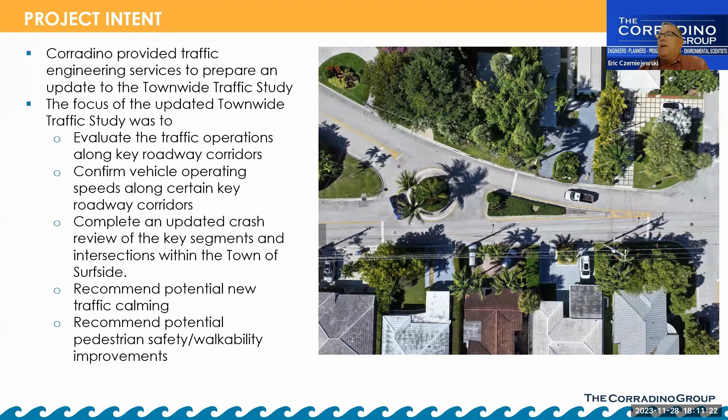The project intent: the town's master traffic study was last updated in 2012. So 10 years later, we're doing this update in order to update the traffic numbers, look at traffic operations at key intersections, and the speeds throughout the town, including 85th percentile speeds. We'll do a safety review to see where the safety issues and concerns are from a crash standpoint, and also look at potential new traffic calming and pedestrian safety walkability improvements. We'll go over all of those items, but that was our intent and objective as we embarked on this project.

The first thing we do when updating a townwide traffic study is collect traffic data. What you see here is a map showing the data collected back in September of 2022. We collected manual turning movement counts at 30 intersections, depicted with blue circles at key intersections. There was also historical manual turn movement counts at the intersection of 91st Street and Collins Avenue, where we had done a signal warrant study, so we utilized that data.

Manual turning movement counts were collected at two intersections not only once back in September, but again on February 7th, 2023, when Bay Drive was closed for the park project. This let us determine what happened to traffic operations at the intersection of 96th Street and Abbott Avenue, which is unsignalized, and 96th Street and Byron Avenue, which is a signalized intersection.

We also collected data, 72-hour bidirectional volume speed tube counts at 14 locations throughout the town. These are depicted at the red lines you see on the map. These were collected in order to determine what that 85th percentile speed is.

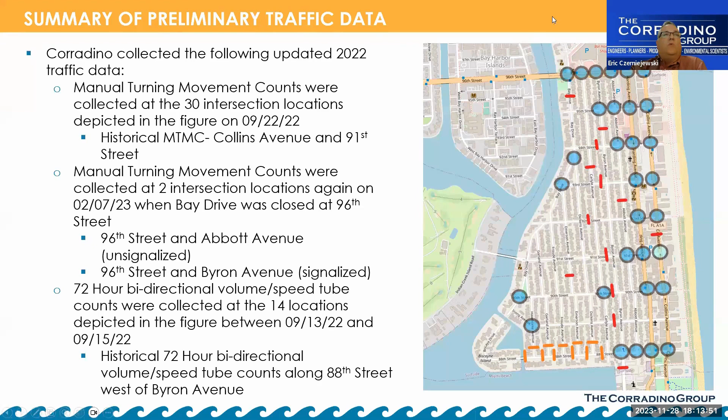In addition, there were historical 72-hour bidirectional speed volume counts also along 88th Street west of Byron Avenue. You see those depicted in the orange lines on the map. Those were done and collected back in 2021 when we did the multi-way stop control analysis study. So all of this here is data that we utilized in our update to the townwide traffic study.

96th Street was also looked at closely. We looked at Byron Avenue and Abbott Avenue closely, in addition to obviously Harding and Collins Avenue, which we've already just looked at. The intersections were evaluated with Bay Drive open and Bay Drive closed.

There was very negligible and minimal difference. Obviously, the traffic counts were collected at different times. September were adjusted for the peak season factor. It was about 11% because obviously September is still not your peak time.

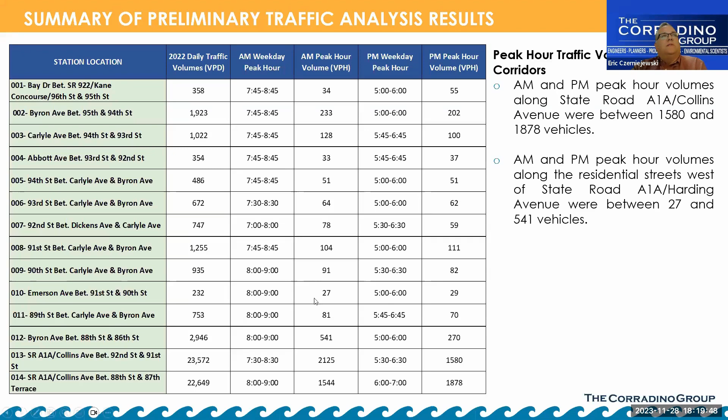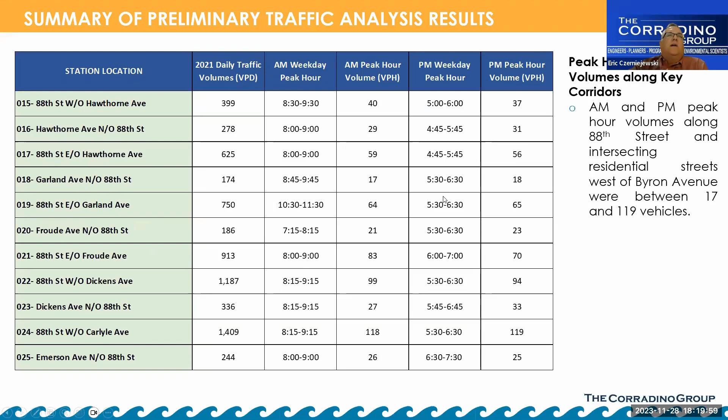This is important because when you see the requirements for traffic calming measures by Miami-Dade County, there's a certain minimum traffic volume they want to see up to a maximum traffic volume. So the peak hour is an important metric when deciding what improvements we can make. This is another important table - here's the same table for 88th Street. Again, low volumes as you'd expect, peak hours between 17 and 119 vehicles in the AM and PM peak hours.

As I was indicating, and as Hector indicated, there's a criteria in order to implement traffic calming measures. This is what you see here from Miami-Dade County. When municipalities have traffic calming funding, 85th percentile speeds exceeding the posted speed limit by 5 miles per hour or over are considered excessive speeding and can have traffic calming measures installed. If Miami-Dade County is putting them in, it needs to be 10 miles per hour or greater than the posted speed limit. That's an important distinction as we go through here.

And here's the minimum traffic volumes: between 150 and 300 peak hour volume, or 1,500 to 3,000 per day vehicles on those streets.

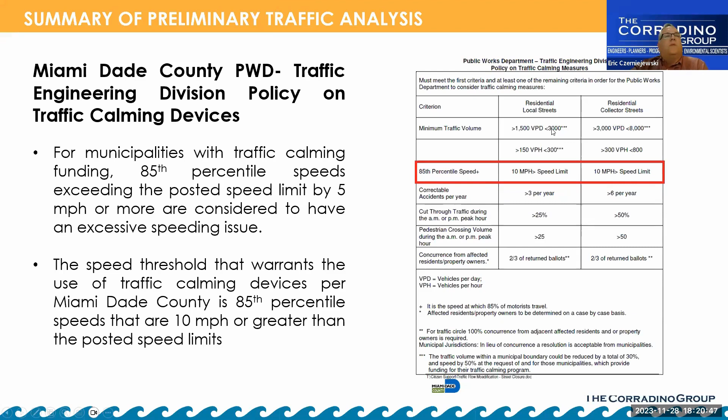So what I did here is see which streets actually meet those metrics: Byron Avenue between 95th and 94th, Carlyle between 94th and 93rd, 91st Street between Carlyle and Byron, Byron between 88th and 86th - that's not in the town. And similarly on 88th Street, there's the volume threshold as well; a couple of streets between Carlyle and Dickens met that criteria too.

As far as meeting that criteria based on speeds to install various traffic calming measures - keep in mind, the streets where we collected speed and volume data were typically locations where you could lay tube counts where there weren't traffic calming measures already, so you could get a true depiction of whether cars were speeding. Obviously, the roundabout at 88th Street and Abbott Avenue deters traffic volumes and speeds right away. So I tried to select locations that didn't already have traffic calming measures installed, to get a good picture.

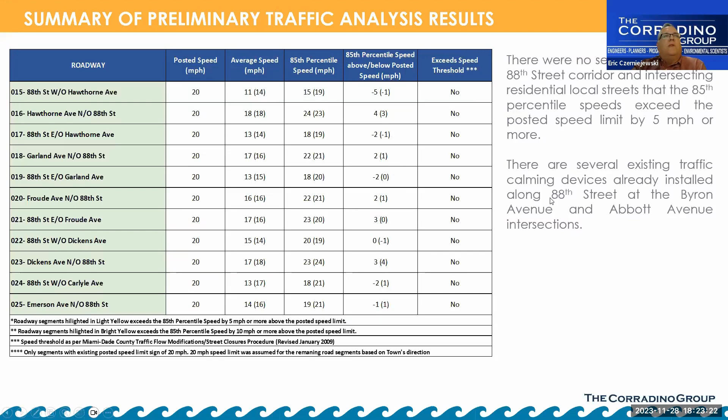What you see here now is we looked at 5 years worth of crash data. Safety review is an important element of evaluating overall safety for not only vehicular but bicyclists and pedestrians. This was an overall 5-year crash review of the whole town limits - you can see the black limits here in Signal 4 Analytics, a program with geo-based data updated nightly at the University of Florida. I did a screening from 9/1/2018 to 9/1/2023, and there were 1,148 total vehicle crashes with 191 injuries and 1 fatal crash at Harding Avenue and 91st Street. The predominant crash patterns were rear end crashes and sideswipe crashes.

I didn't want to just stop there.

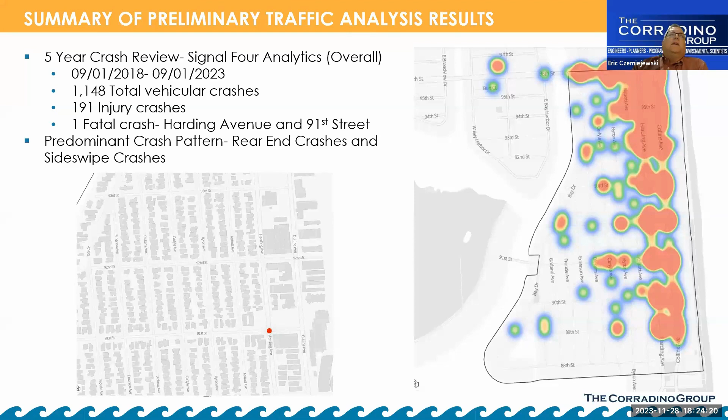I then looked at the crash data for the residential streets west of State Road A1A, Harding Avenue southbound, so that we could determine the metrics for the crashes that were just in the residential area. You can see the heat map of where those locations are.

That's important too, because another one of the criteria for Miami-Dade County for installation of traffic calming measures is correctable crashes and crashes at intersections. You can see high locations of crashes along Abbott Avenue, 95th, 91st Street for a stretch, at Carlyle, Byron, and Dickens. Then 88th Street, there's a stretch of crashes as well. The predominant crash patterns were left turn and angled crashes.

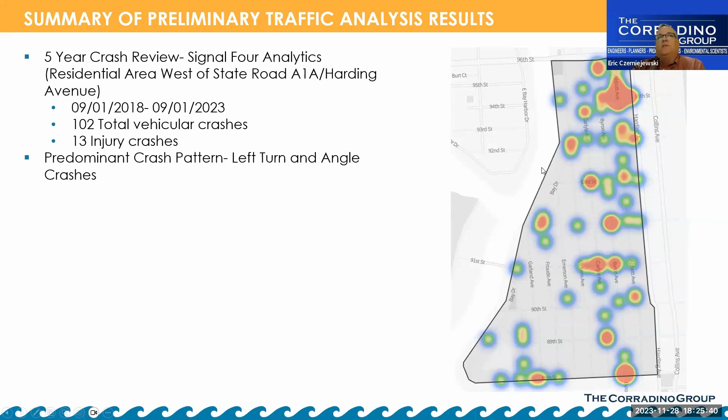I did the same network screening for areas west of State Road A1A, and 102 vehicular crashes along with 13 injury crashes were in the town. It's a significant difference from 1148 to 102, but still way too many when we want zero crashes on our roads, especially in our residential neighborhoods. So that gives you a picture of the residential area.

So then I also looked at, I kind of took away from the heat maps, you can start looking at dots as opposed to the heat map. Obviously it's similar in nature, the heat map was created around these areas, but this gives you an idea of where crashes were exactly in the residential neighborhood.

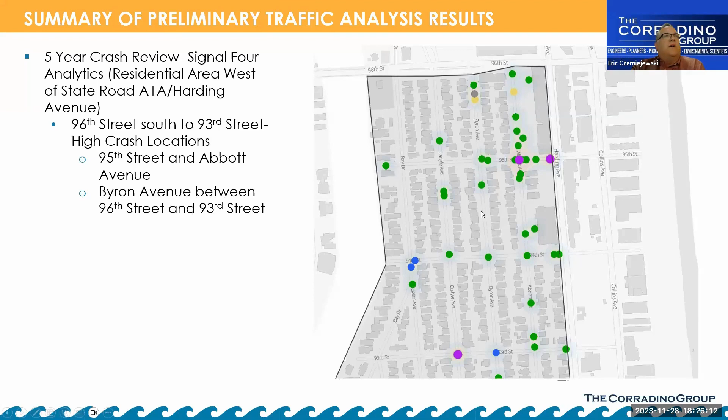We found 95th Street and Abbott Avenue, Byron Avenue between 96th and 93rd Street, there were still crashes. I moved my way down. Obviously the town is large, so I wanted to zoom in here. This is 93rd Street to 90th Street. Again, you can see dots coalescing here at Byron 92nd, there's a few others along here.

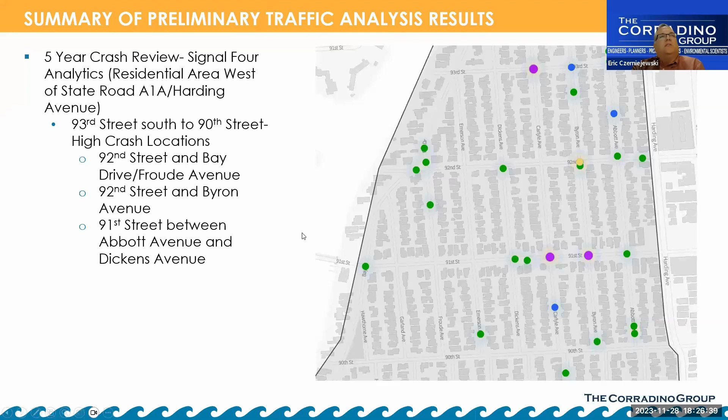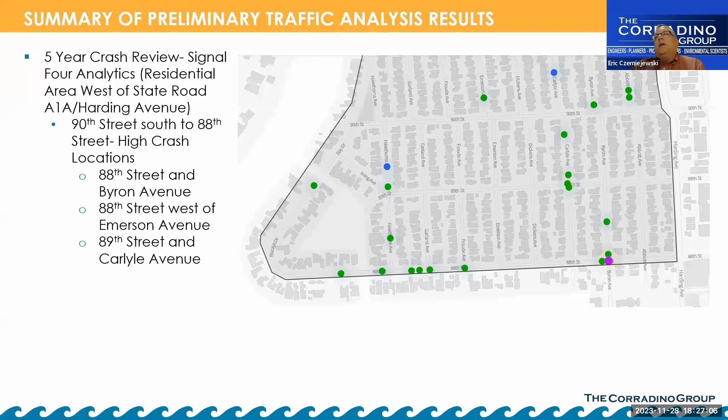So that gives you an idea of other high crash or crash locations where they had a number of crashes over this five-year period. To get further along the southern end of the town, you see here 88th Street, and there's a lot here along this stretch between Froude and Hawthorne, even on low speed streets. So something to keep an eye on as we look at potential traffic calming and walkability, pedestrian safety improvements along the residential streets.

This starts to get into where there are safety concerns at intersections and road segments from a pedestrian and bicycle standpoint. In that same period of time, there were 53 bicycle and pedestrian crashes, along with 44 injury crashes in that five-year period, which is obviously a high percentage. If it's a pedestrian bicycle crash, you expect 44 out of 53 to have injuries.

Predominantly, most of these crash locations were along FDOT state roads, that's A1A, Harding Avenue, Collins Avenue, and 96th. But there are still some locations within the residential area where we had pedestrian bicycle crashes.

Here I want to talk about recent pedestrian safety, walkability, and mobility improvements. The town has made, and I've been involved with, traffic mitigation improvements since 2015. Over these last 8 years, the town has made traffic mitigation, pedestrian safety, walkability, and pedestrian improvements very important, whether through the capital budget or going after grants.

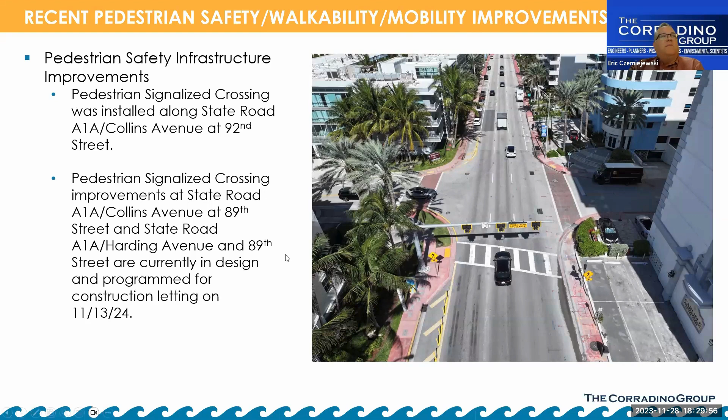I followed up with FDOT today and they gave me the update. They are programmed for construction letting on November 13th, 2024. It's another important infrastructure improvement project for pedestrian safety. The design is at 90% and expecting construction letting sometime late next year, early 2025.

As additional improvements, crosswalks start to fade away and become a liability, so the town's Public Works Department is going through and making enhancements. This is at 95th Street and Byron, and a crosswalk was also placed at 94th and Abbott. These enhanced zebra stripings improve pedestrian safety for residents, visitors, and tourists.

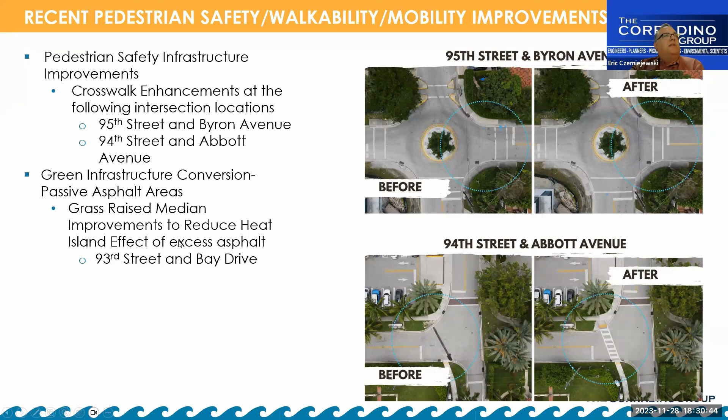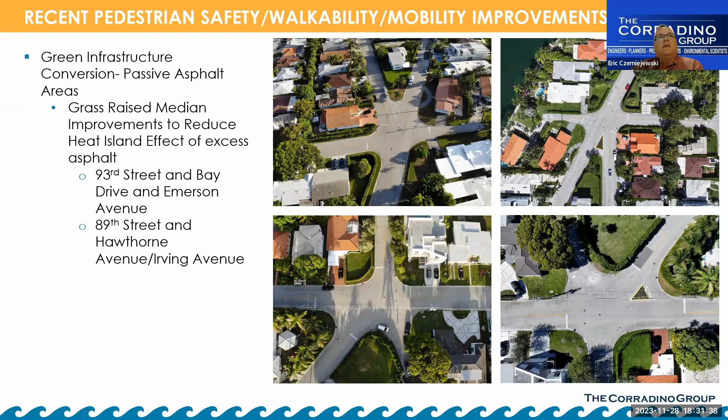I also want to mention the green infrastructure conversions of passive asphalt areas that were recently constructed. You can see before and after pictures at 93rd Street and Bay Drive, and Emerson Avenue, where little medians with green space replaced pure pavement. This channelizes cars, making it safer for vehicles, and adds resiliency and sustainability by reducing the heat island effect. You can also see improvements at 89th Street, Hawthorne Avenue, and Irving Avenue. These are all important improvements to the town's residential streets.

When you think about traffic calming, there are a lot of different measures. I'll touch on some of these. A roundabout, or neighborhood traffic circle, reduces travel speeds at intersections. You put a little circle in at an intersection and allow cars to travel around it, which reduces speed based on the diversion of the vehicle's geometric path.

Speed humps, which you have in town at a number of locations, deflect vehicles and lower speeds. Medians, like what you remember seeing along 88th Street at an intersection, keep vehicles in place as an access management opportunity, causing cars to veer out while eliminating certain movements to improve intersection safety. Diverters cause road closures as well, like at 94th and Abbott and Carlyle on 96th Street. There are also chicanes and pinch points.

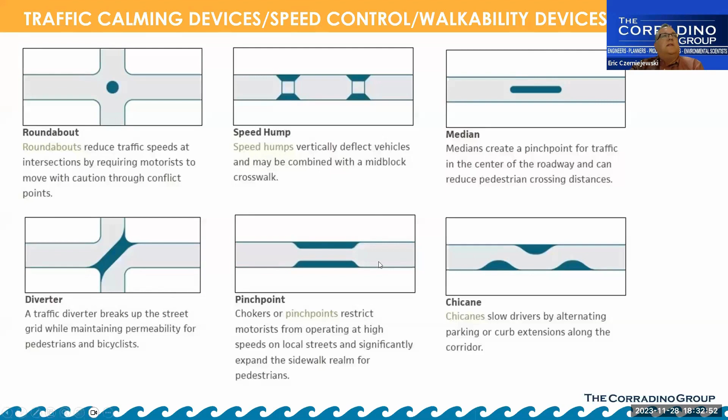This shows pictorially some of these same things: a chicane, a road closure location, a speed hump, and again a roundabout, much bigger than the neighborhood traffic circles, like the one in Cutler Bay and this one along 80th Street in the town.

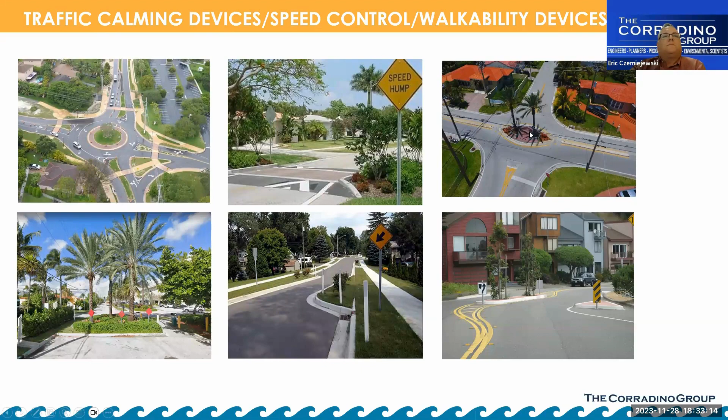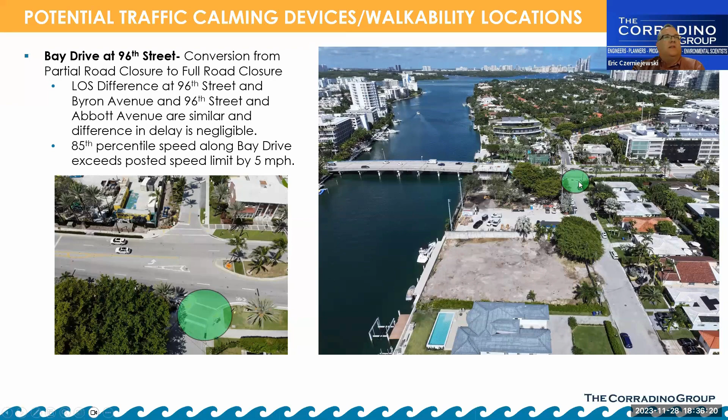The 85th percentile speed along Bay Drive does exceed the speed limit by 5 miles per hour. So we could potentially do a road closure similar to what you see at Carlyle and 96th Street at this location. Again, this is not set in stone, just one option.

Byron Avenue and 95th Street, the north leg. There's a little bulb out here at this location, you can see in the lower left-hand corner picture. There's an opportunity to improve pedestrian safety by making this more of a speed table instead of just a street level improvement, which would allow pedestrians to be elevated. Past crash history along Byron shows crash history between 96th and 94th. This would improve pedestrian safety and walkability, and the 85th percentile speed metric is met here as well.

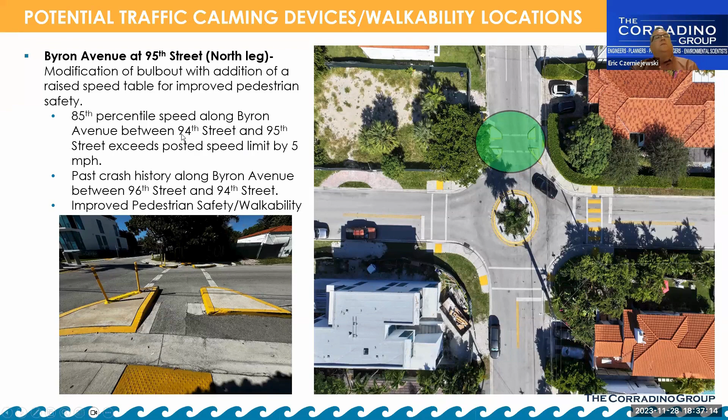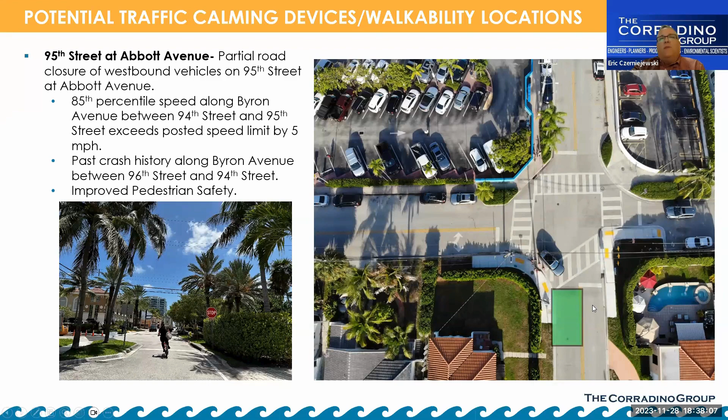95th Street at Abbott Avenue - a partial road closure of westbound vehicles on 95th Street at Abbott Avenue. This is an example you can see already installed in the town. We looked at the 85th percentile here; there's a lot of commercial traffic coming out of this parking lot. You could do something similar to this corner closure to eliminate that traffic coming in westbound on 95th Street at Abbott Avenue. There's past crash history along Byron between 96th and 94th, and this would improve pedestrian safety and eliminate some of the traffic diversion at this location.

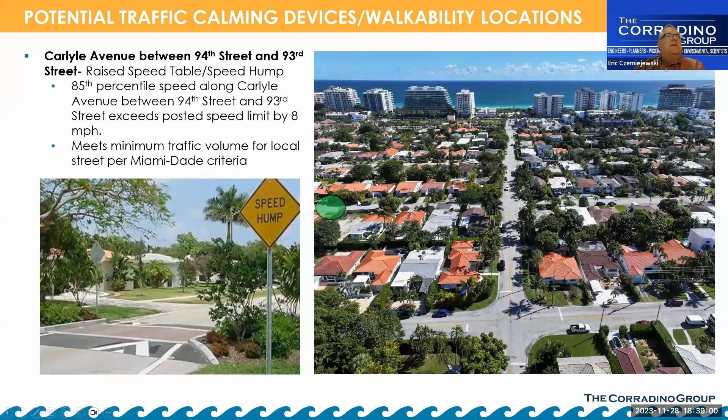We'll get into some of the speed tables and speed humps. Carlyle Avenue met the 85th percentile speed between 94th and 93rd Street. It exceeded the posted speed limit by 8 miles per hour, one of the higher speeds. It meets the minimum traffic volume criteria for local streets per Miami-Dade County criteria for installation of traffic calming. This is my aerial drone image showing a tentative location, probably mid-block between 94th and 93rd Street, giving an idea of a potential location for a speed table or speed hump.

You don't want to see too much of a speeding issue usually from 0 to 4 miles per hour over - that can be handled through enforcement. Once you get to 4 to 5 miles per hour over, it starts to be a concern, which is why the performance metric there at 5 miles per hour is what it is for Miami-Dade County.

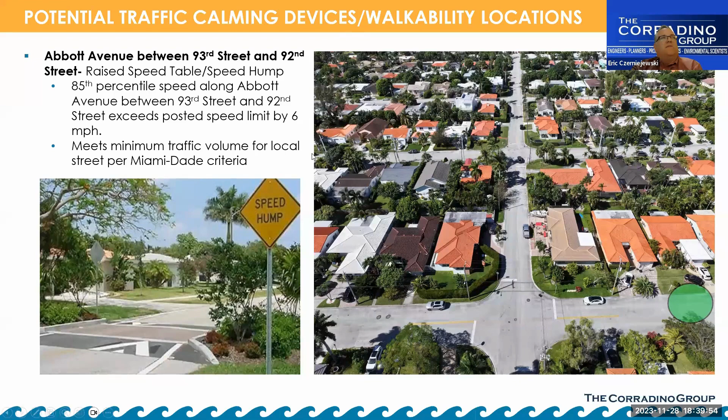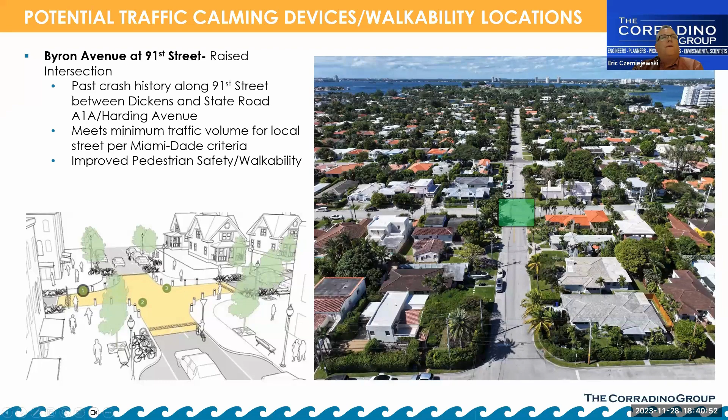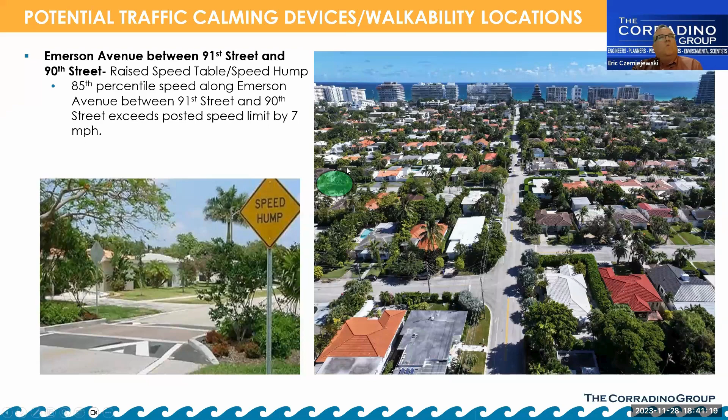Carlyle Avenue at 88th Street, neighborhood traffic circle. There are sight distance concerns, which came up during the multi-way stop control study along 88th Street. We noticed that if your car is sitting here, at a lot of these intersections it's hard to see past shrubs, hedges, or trees to see cars, and this was a concern for sight distance even when it wasn't an all-way stop location. Putting in a traffic calming neighborhood traffic circle, and making improvements to some of the sight distance issues, would improve this situation. This location meets the minimum traffic volume criteria and would also be a pedestrian safety and walkability improvement at 88th Street and Carlyle Avenue.

One of the final locations I had—again, these are potential traffic calming devices and walkability locations—is at Hawthorne Avenue and 88th Street. You could do a median separator, a raised diverter at this location, potentially a half circle too, because this is a T intersection, so it would be hard to put in a neighborhood traffic circle.

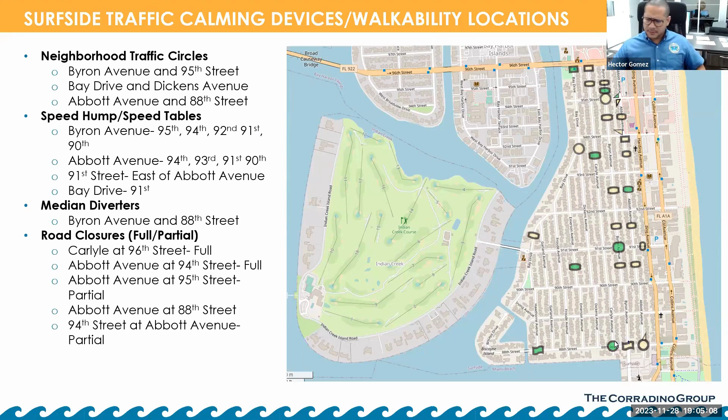And I wanted to, so the 88th and Carlyle circle here, certainly we could move that circle along, the speeds just weren't along 89th as much as they were still on 88th Street.

90th Street presents an interesting situation where you have a lot of offset streets. A raised intersection potentially along 90th Street down to Carlyle around there, making it slower traffic as well, and deterring people is another way to eliminate some level of intrusion as well.

So I see that it's not along 90th and 89th Street. So those are great observations and can be considered as well through potential other measures.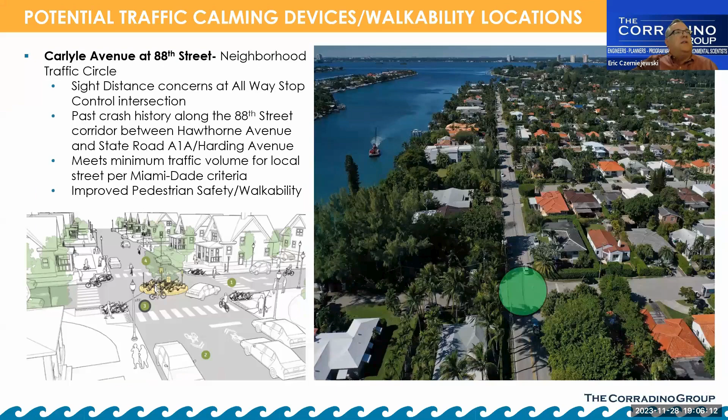And what I do want to mention too, Hector, if I may, is this wasn't part of the overall presentation, but I do want to talk about the one-way pilot program that occurred back in, I think it was 2017. Just want to refresh memory. This was done as a way to look at a potential one-way pilot program along 90th Street and 89th Street.

Traffic data was collected on not only 90th Street but 89th Street, both before the pilot and after the pilot. 90th Street traffic volumes eastbound went down, or increased 39%, and westbound traffic increased only 25% on 89th Street for the one-way pilot program.

But that allowed additional street space to be created for repurposing of lanes for other modes of travel and for improved pedestrian walkability and safety. That's not to say you have to do the one-way pilot program or implement one-ways. I did want to mention that because that affects 89th and 90th Street.

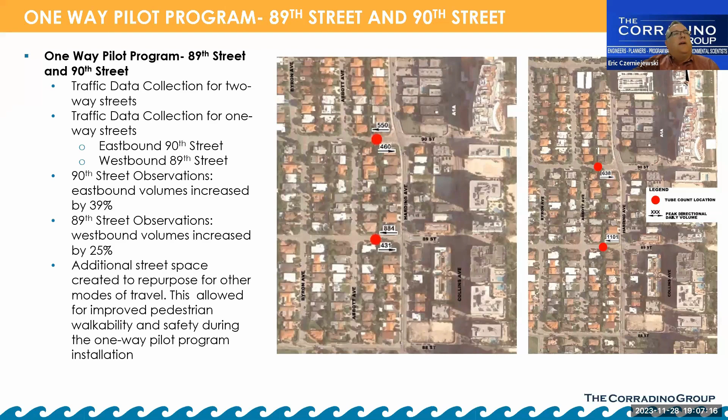We also, at that time when we looked at this, we also looked at the right of way. Because that's important - if you do a one-way, what happens along there? The street right of way on 89th and 90th are both 50 feet with 27-foot street widths. Existing two-way section, kind of 2 lanes, 13.5-foot wide lanes.

You could go with a 15-foot wide travel lane with a 12-foot multimodal shared walking path or bike path. Those are all opportunities, it's not a recommendation here. I wanted to just refresh everybody's memory that this traffic mitigation program has been going on since 2015, and there have been a number of steps that the town has gone through to look at.

This is one of them. In addition, there were 2 additional options here - if you did 90th Street, another option was to do 90th Street one-way on Harding Avenue, or 92nd Street east of Harding Avenue, and putting a median separator. I just wanted to refresh our memory, Hector, on some of this stuff.

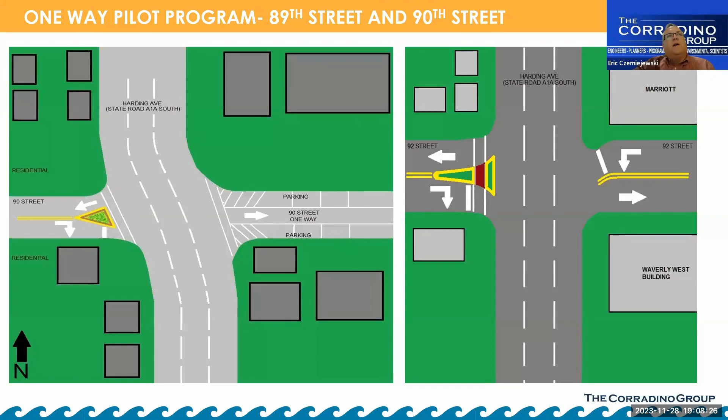I know I didn't answer the gentleman's question with the exact other improvement, but there can be improvements along going back to the overall map along either 90th or 89th Street as well. Some of these offset streets present certain challenges as well. That's all, I'll stop sharing, Hector.

Thanks. I saw from those numbers quick, I saw that you get more of an impact from the southern side than the northern side. We'll revisit that. I'm curious to see those numbers closely.

Mark, before I move on, did that address your concerns? I see there's some concerns that we'll have to address as we proceed. Thank you for letting me jump in again, because that's one thing I forgot to talk about.

I remember the charrette from years ago, we've been here a long time. And I was very intrigued by the sound of one-way streets. I don't understand why they were done west and east. Why weren't they done north-south, to show people an example of what a residential block could look like with medians and sidewalks, a pilot program to give a model of how wonderful that would be.

And again, I would gladly have to drive around an extra block to come back down one way to get to my house if I had to, if it would make our streets safer. But I just don't understand why it was done east and west, and I'm hoping we could do some sort of model street in the future, to show people how great it could be to have a one-way, walkable, safe residential street in Surfside.